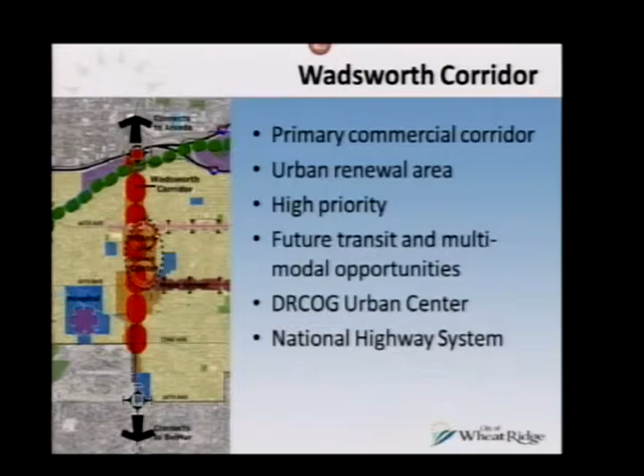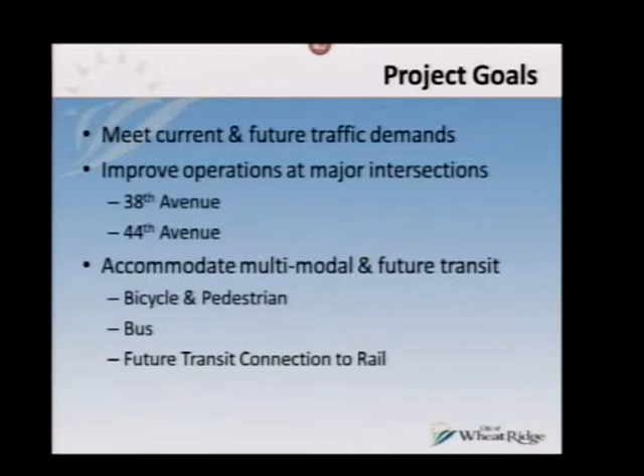The project goals we have are: we're trying to meet current and future traffic demands, we're trying to improve the operations at the 2 big intersections we have at 38th and 44th, and we're trying to do something that doesn't do very well on Wadsworth right now, which is accommodate bicycles and pedestrians. We have a major bus route, I think it's number 76, on Wadsworth right now, with 15-minute headway. So if you've ever been stuck behind a bus, they stop early and often, don't they?

Yes, they do. And also, because we've got 2 rail corridors just north and just south of us, it's on a list of things that maybe get some kind of enhanced transit between those 2 rail corridors. Wadsworth is kind of a unique road because it's on the west side of town, it's the longest north-south running road. It goes the farthest south and the farthest north.

So it's a really unique road that runs through Wheat Ridge here. So I just wanted to throw this up. We got a grant from the federal government through DRCOG through CDOT. The federal share of this is just over $600,000. We're matching right around $500,000. And what we've got proposed right now in the funding with our consultant is about $1 million, just over $1 million.

So we've got a little bit of room left in the overall grant, but that's what we're looking at. This is not an insignificant project. It's going to be 15 months. These guys, there's a host of people here tonight. They're just not here to talk about the boards. These are all the folks that are actually working on the project also.

So our next steps after tonight is they're going to work on the different alternatives of what could happen to Wadsworth to try to do all the things that we're trying to do. And we're going to go back to council on October 6th and come back to the public again on October 8th to show you what all the alternatives are and to get your input on those, how you guys feel about them, what's going on. And we really do want input from folks.

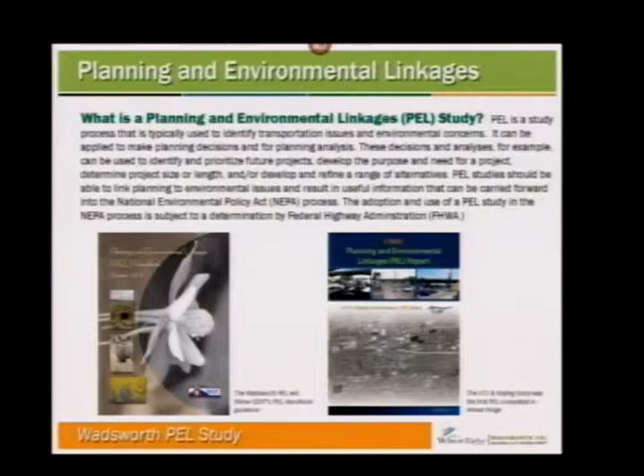They've actually written their own handbook on how PEL should be done in Colorado. And then the document on the right is actually, we've done one PEL in town already. We did one for the Kipling I-70 interchange. That was actually run by CDOT. That one's done. It's actually available on the website if you want to go look at it sometime. It's very interesting reading if you're into that sort of thing. If you're not, it's great for putting you to sleep.

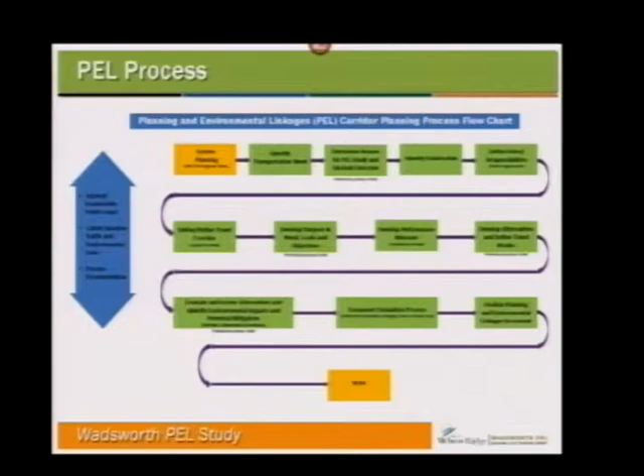This is actually the process that we go through with a PEL, and there's a board, and these are in order as you go around the room. So this is the second board in. And then this just talks about what's going on with Wadsworth, what the corridor background is, what is Wadsworth Boulevard, and then what we hope to accomplish with the Wadsworth PEL.

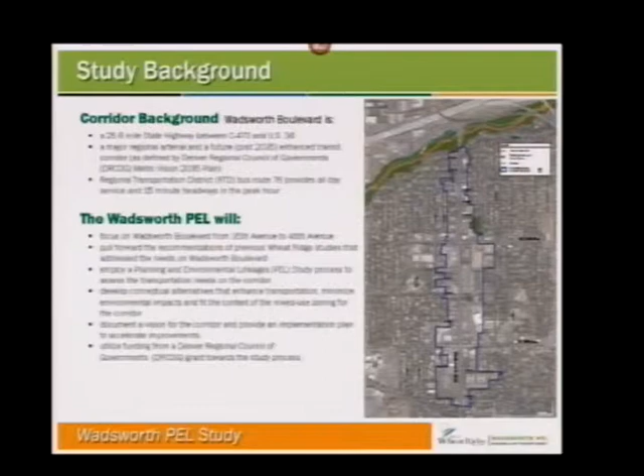So then the recent planning history - this board shows all the work we've done on Wadsworth so far. There's been a couple of documents prepared for Wadsworth. This is more of a transportation-related document versus the other ones which are more land-use-related. This is our purpose and need - we'd really love all of you to go to that board and read it.

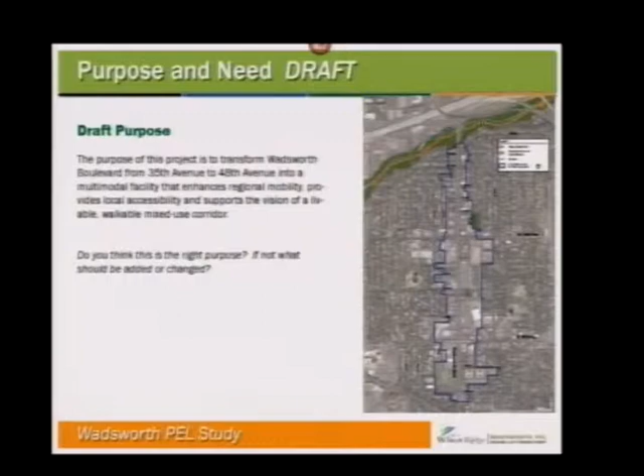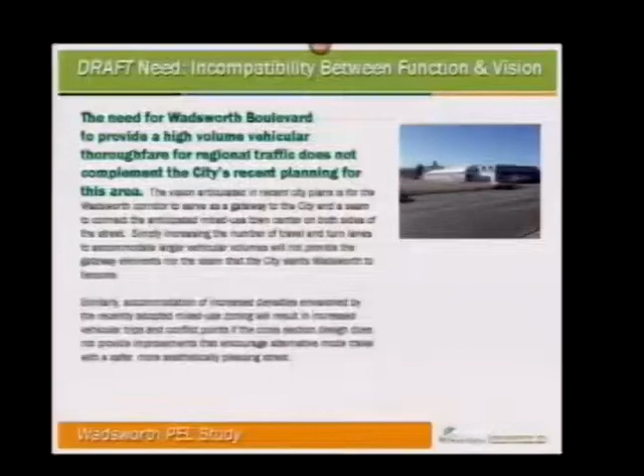I'm going to flash past this if you guys are intently reading it now, but we'll zip by it. We'd love to hear if you think this isn't where we need to be going, or if you think this is where we're going. These are draft needs - things we don't think are working very well. We don't think Wadsworth functions very well, and it certainly doesn't fit the vision we have for what we think Wadsworth could be.

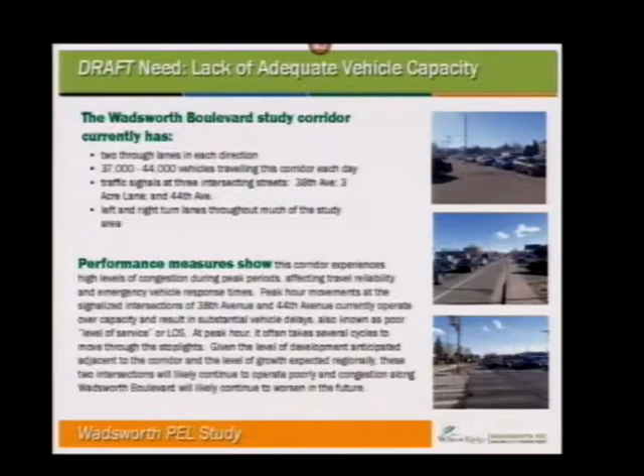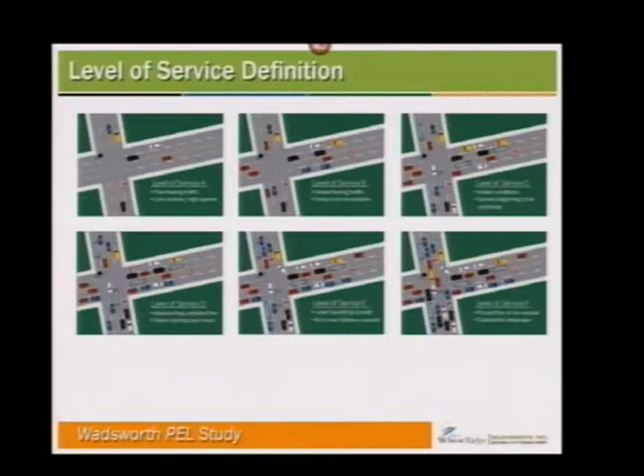This is a slide that's over right in the middle of the room. It's called level of service, LOS. This is the way traffic engineers relate to how bad things are - it's graded A through F, and as you can guess, F is bad. We think most rush hours were in the E-F range, and at lunch we probably approached the E range also. So what we'd like to do is be up in the B, C, and D range. Not many roads like this are going to be in the A range, except maybe at 3 a.m. or something, but we want to get that level of service better.

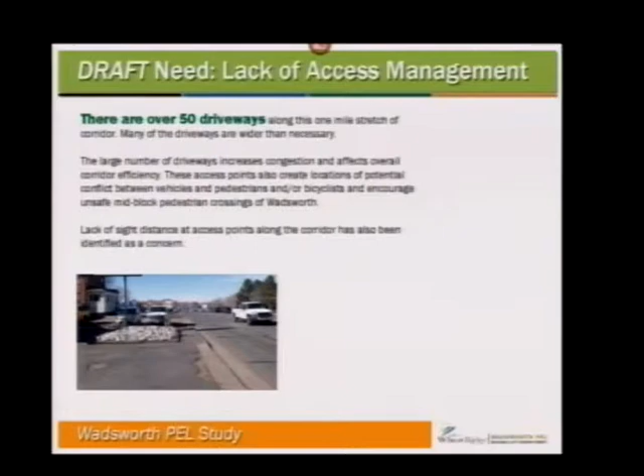So we have a lot of driveways on Wadsworth, which create a lot of conflicts for pedestrians and bikes, and also make it a bit difficult to drive the corridor. We don't have a lot of great sidewalks, as you all know if you've ever tried to walk Wadsworth. We have ongoing safety issues.

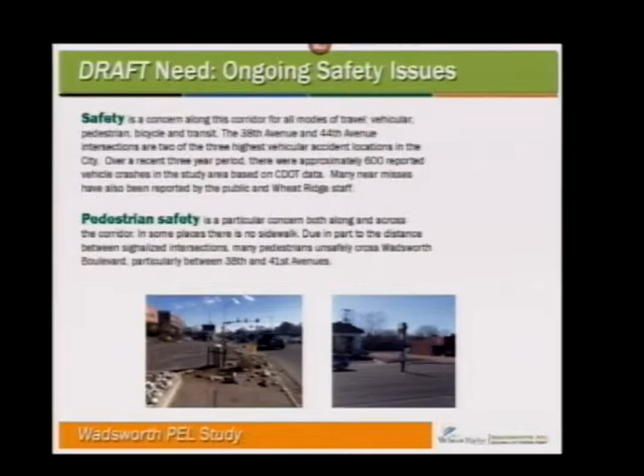I asked the consultant, about the picture of the guy walking across the middle of the street, if they had to work really hard to get that. He said they had to work really hard to pick which picture of all the pictures they had of people walking across the street.

So this is another needs board. This is the other place we'd really love to have input from folks. We've got some pins and sticky notes over by this one. We'd love you to write down things that we haven't identified as needs. If you think there's something else that needs to be done to Wadsworth besides what's on our list over there, we'd love to hear from you on that.

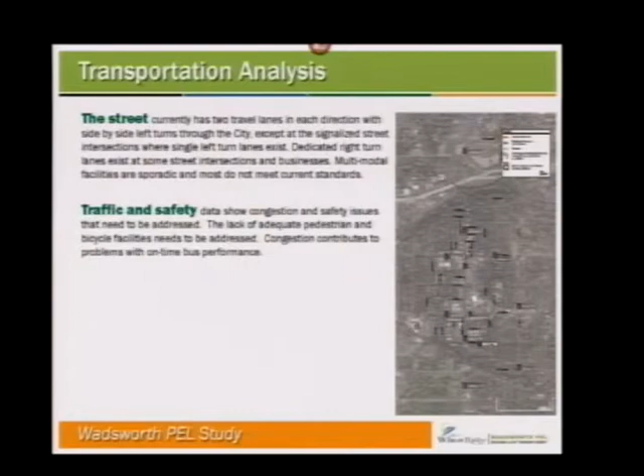This is a slide that shows the transportation analysis we're doing. We actually have some of the traffic counts they've already obtained along the corridor, but it shows all the signals they're looking at and all the different places they've done traffic counts.

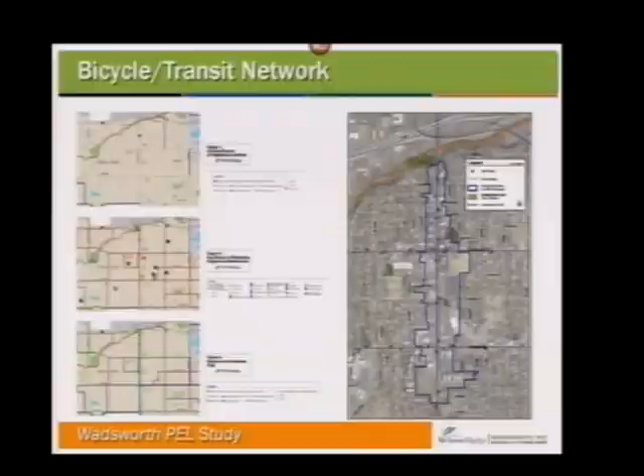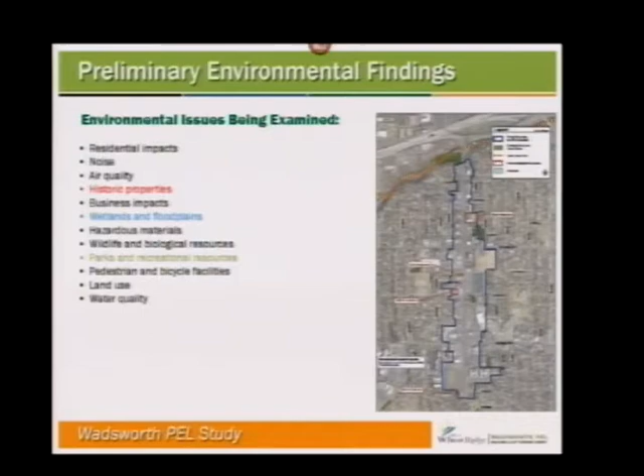We've already done quite a bit of work on the environmental issues. We found a few historic properties. We, of course, have wetlands and floodplains down by the creek. And then we have a few parks and recreation places up and down the corridor. We have, I think, 3 or 4 properties identified that look like they're going to be historic properties, and we'll have to work our way around those.

And that's all we've got on this. So at this point, if you guys want to head back over there, you can look at the boards and talk to folks, or come up and talk to me too. We've got quite a few staff folks - mostly all the people standing up, except for Mr. Lesher back there, he's not staff. The rest of the people standing up are mostly staff. We've got a city council person scattered in there also. So if you see somebody with a name tag hanging around their neck, you can pretty much ask them a question about what's going on, and if they don't know the answer, they can point you towards somebody that does.

So we'll do this again in 20 minutes, and I'll try to talk faster next time so this doesn't take so long.